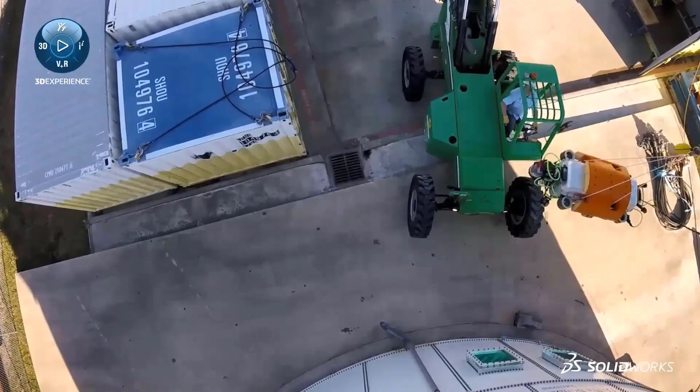Tackling the inspection of dark, harsh, and sensitive environments is the specialty of Square Robot, a startup based out of Boston, Massachusetts. Using advanced submersible robotics lowered into a petroleum storage tank, they autonomously inspect these environments for defects in the storage vessel using state-of-the-art sensing technology. By being able to use robotics for this task, they have reduced costs for their customers while improving accuracy. Their design is focused on safety and reliability for these unique environments, providing maximum uptime and allowing inspections to take place when and where humans would have to otherwise wait for the tanks to be empty.

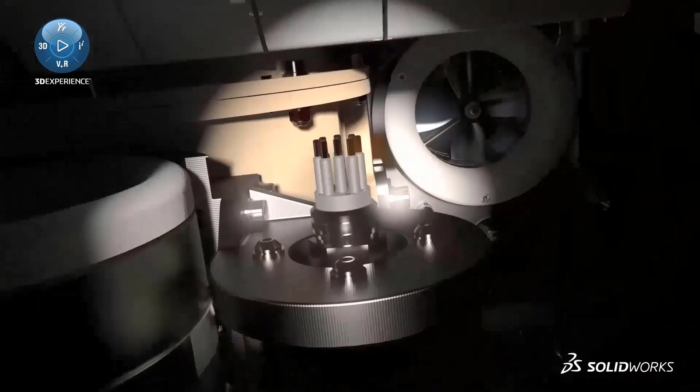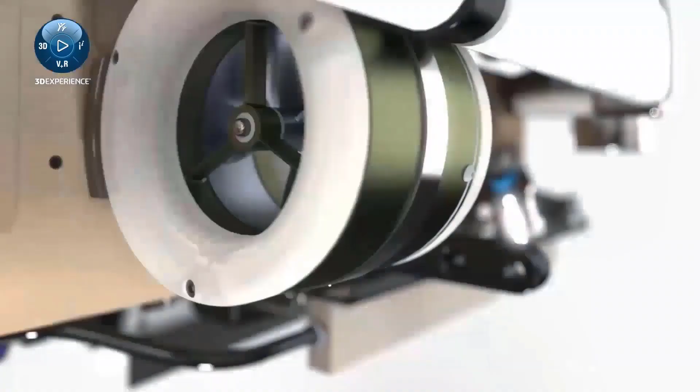Founded in 2016, Square Robot chose SOLIDWORKS and DelmiaWorks as their go-to design and management solutions. It was critical for them from the start to have the ability to work from anywhere, combined with best-in-class design tools.

Excellent. So Square Robot really focused on four key things in this first session that we're going to be looking at. We're going to first start off with what every good SOLIDWORKS user is doing, and that's modeling and detailing drawings and parts. Then we're going to take a look at how Square Robot used some of the new functionality in 2021 for their systems engineering department.

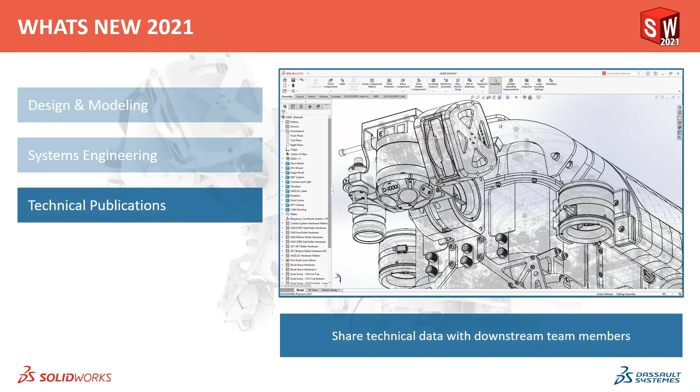And like all good design projects, we need to be able to share our technical data with downstream team members. So we'll look at how eDrawings and Composer can help publish and share some of our technical information with those non-technical people. And then last but certainly not least, how can we leverage the SOLIDWORKS suite of tools to help organize our entire team and our entire company to share, control, and be ready for production of our product.

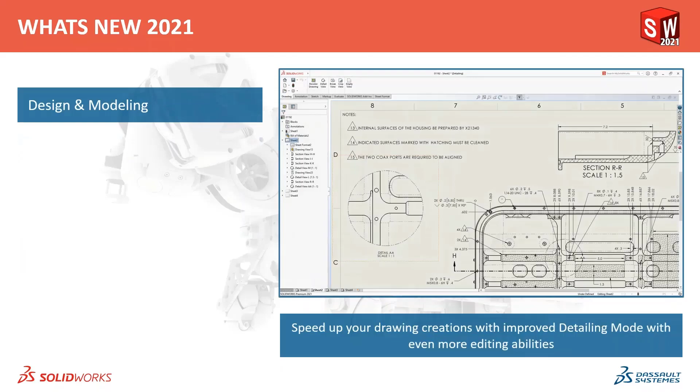So with that said, like most good design projects, let's start off with the basic design and modeling inside SOLIDWORKS. The first thing I want to leverage is some of the new enhancements regarding the actual interface. In this case, my task is to finish this part up, do some extrusions, and then do some circular patterns of the extrusion.

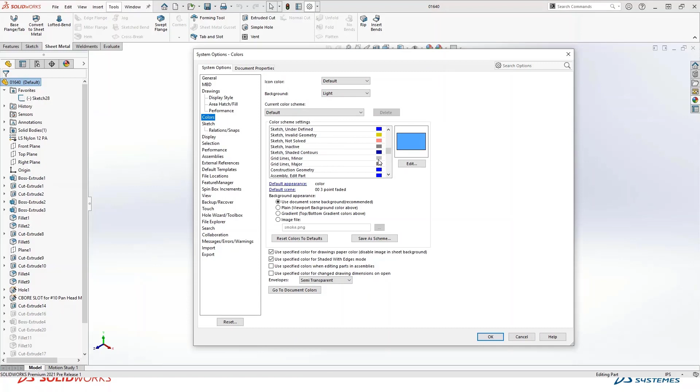Sometimes it's pretty hard and difficult to see things when all the colors are similar hues. So new for SOLIDWORKS 2021 is the ability to come in here and see colors. But on top of that, you can now see the color palette directly on the color scheme settings window, which makes it a lot easier to find what you're looking for, in this case my inactive sketches, and change it to a color that's maybe a little bit more appropriate or a little bit easier to see.

Now, some of my users always ask me, hey Roland, how do I get more screen space? New for 2021 is the ability to collapse the command manager by coming up here to the top right and simply clicking on the collapse window. On top of that, we can clean up the interface a little bit more by moving the quick access tools, which is this set of tools right here, from the menu bar over to the command manager.

Now, while we're here, I want to make it a little bit easier to navigate through my interface without constantly moving my cursor. One of my favorite new search functionalities is actually this functionality in the shortcut bars. You can now come in here and search directly for any tool that you're looking for by simply typing it in that search field in the actual menu.

In this case, I want to add a few shortcuts into my shortcut bar by simply dragging and dropping. You can use this search menu and add functions and features to anywhere in the interface. So I'll go ahead and add the undo and redo commands up here to my quick access toolbar.

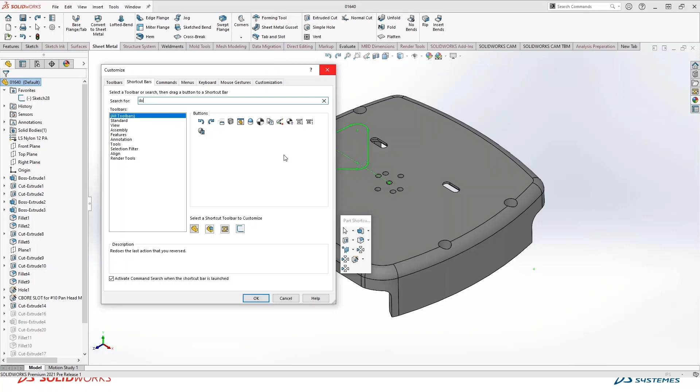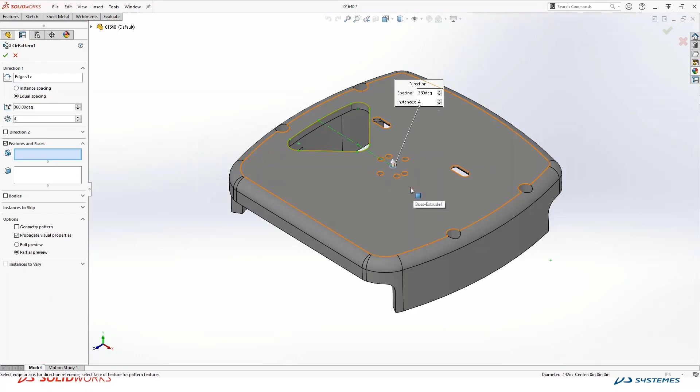Now that we've done some customizations to our interface, let's finish this design out. I'll go ahead and select my sketch, and use my shortcut bar to create this extrude cut to extrude the entire part. What's nice is by customizing your shortcut bar, you can limit the amount of traveling directly on your interface.

By putting your most common features into your shortcuts, in this case we'll finish this design out by doing this circular pattern. Now sometimes I do something that I'm not really fond of, and a lot of people, myself included, will use this undo command.

If you've been using SOLIDWORKS for some time, you know that undo has always been a bit of a challenge, because if you went too far back, you didn't have the ability to do a redo all the way through the feature tree. Now in 2021, the redo and undo is a more complete functionality. By simply clicking on this redo, I can go back and forth inside my feature tree, undoing and bringing back work that I've already created.

Let's keep moving through this design and finish up this sheet metal part. One of the design criteria is to have a stiffening feature that goes the entire length of the perimeter all the way around this part. So to do that, I generally use an edge flange.

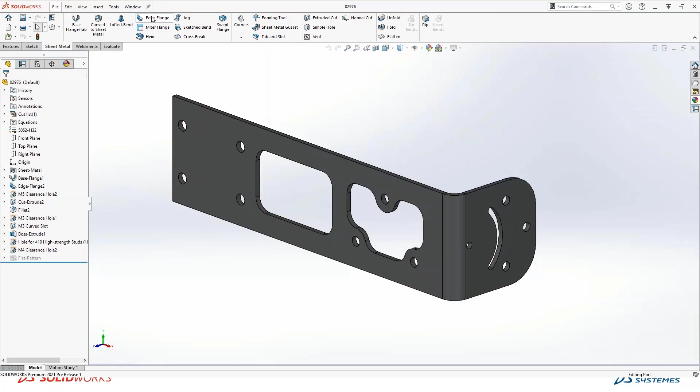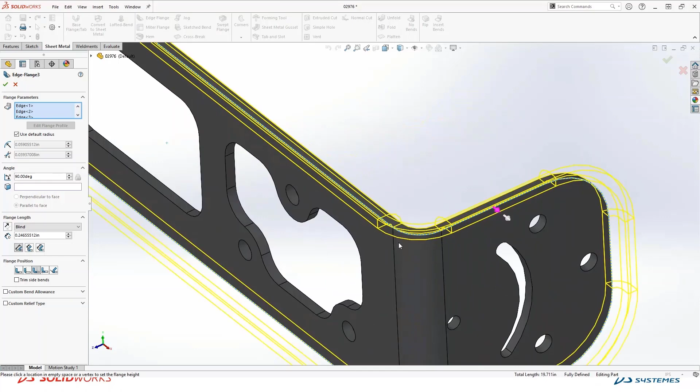What's new for 2021 is if you right click on any one of these edges, you'll see an option called Select Tangency, which has been around for years. But what's different is that now we can extend an edge flange across non-linear edges connected to a linear edge. In this example, my flange of a quarter inch is now being propagated across the bend region, giving me a more stiff component.

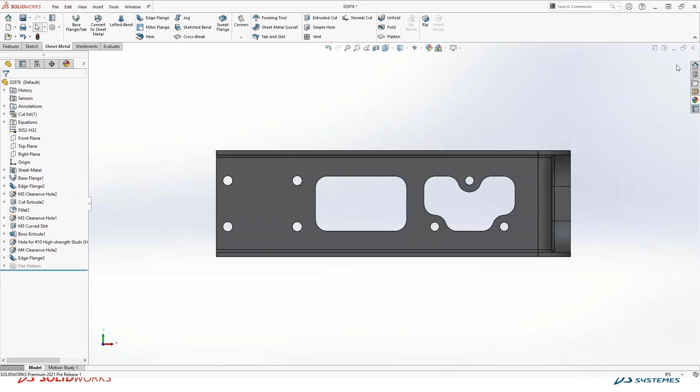What's really neat is, like any other sheet metal part, I can flatten this out and prepare it for a DXF for my manufacturing environment. So we're giving you a lot more functionality inside that edge tool to create more complex geometry.

Let's look at another way we can leverage that edge flange inside SOLIDWORKS. In this case, I have this edge flange feature right here, but I really need to protect these components on the inside of this roving vehicle. So let's do a quick design change.

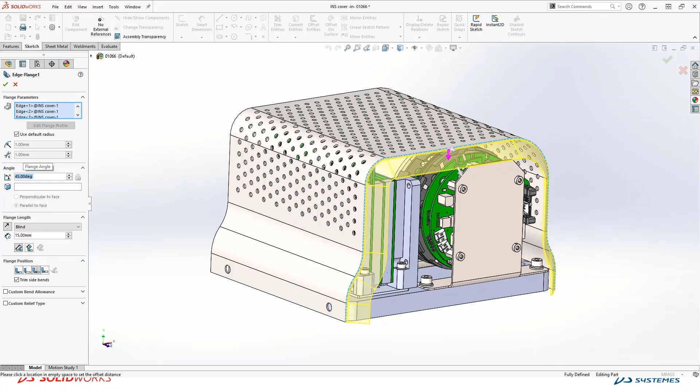I'm going to edit my part and edit this feature. You'll notice that even when bending an edge flange inside a bend region, I can go in either direction, and use all the common tools you're used to. In this example, I'll flip the rotation and modify the angle of this edge flange, producing a more complex piece of geometry that protects my internal components.

Just like before, if I want to flatten this out and create a sheet metal flat pattern for my manufacturing environment, this edge flange is able to be flattened and create a DXF just like any other traditional edge flange we're used to creating.

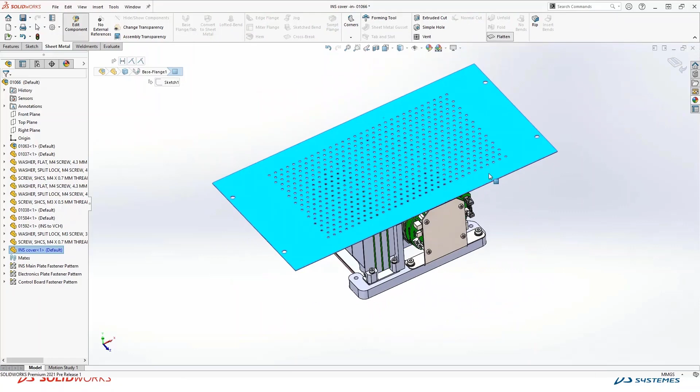With the advancements of technology, it's very commonplace these days for customers to use 3D printing. New for 2021 is better support for the new 3MF file type. I can save out by doing a save as and change my file type to 3MF. Underneath your export options, we now have better support for colors, textures, transparency, and many more features on that 3MF export, which helps you prepare files for 3D printing.

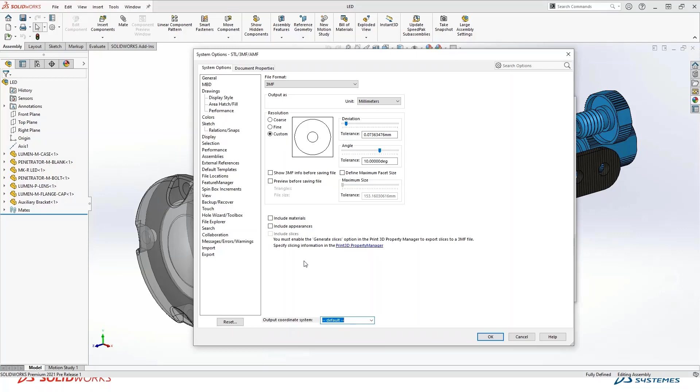Sometimes we get a 3MF from a customer, so how can we leverage that in SOLIDWORKS? By simply going to File Open, you can change your file type to 3MF, choose the file, and we now support per facet and per vertex coloring, as well as textures and transparency, which provides a better visual on that 3MF import of the graphic body.

Additive manufacturing continues to rise in capability and popularity, and we're trying to leverage and embrace these technologies by giving you better support for the common file types when doing 3D printing.

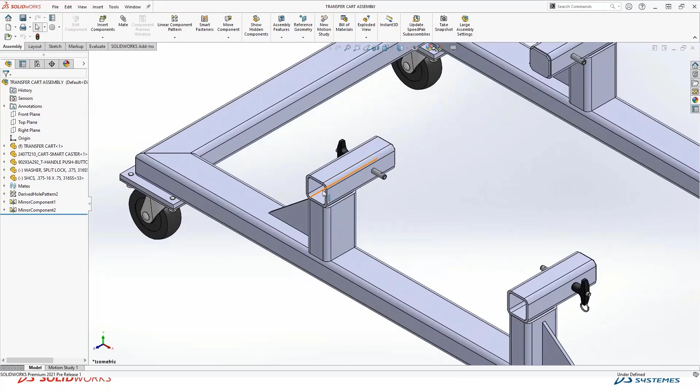By far, some of my favorite enhancements that I've been using so far this year in 2021 come inside the Weldment environment. In this example, I need to make a modification to these structure components, because there's a liquid getting trapped inside here when we put this down inside the vessel. So we want to create a mitered flange here as opposed to an end butt. Let's open this part up and start making our design changes.

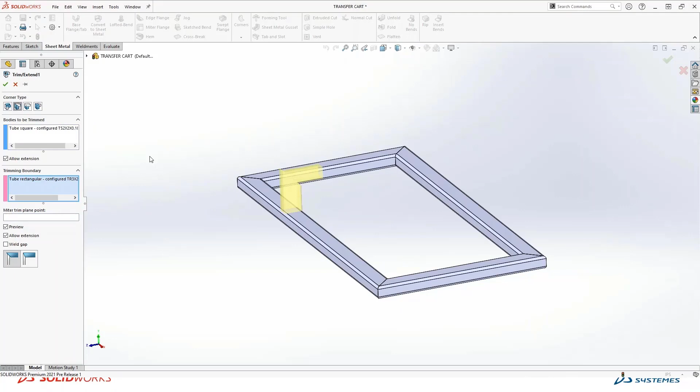So we can see this a little bit better, I'm going to roll my rollback bar up to this trim, and let's edit this trim. Now the challenge is if I simply move this to a miter flange, these two components are not the same shape and not the same size structure members, so I end up with a miter that doesn't accomplish quite what I need.

New for 2021 is a brand new option called Full Flush Miter. What this does is when I miter two components that are not the same size and not the same shape, it creates a flush miter as opposed to an angular miter. The benefit of this is now I don't have to come in here and calculate what that angle is going to be - SOLIDWORKS will do that automatically for me.

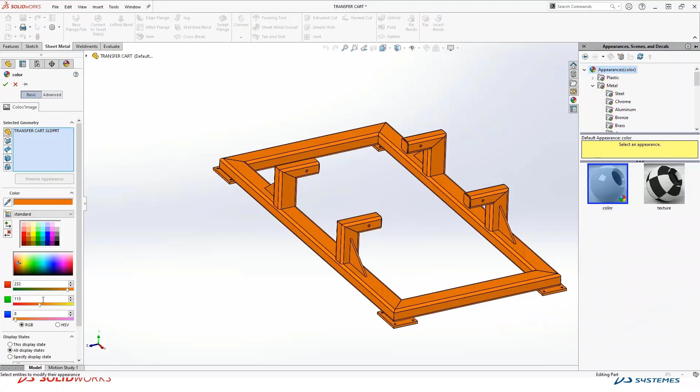Now the next thing we want to do is prepare this for our powder coating, and we want to give an accurate representation of what this is going to look like. Let's apply an appearance. Obviously I can use my standard color wheel or even create a custom color, but what I'm really after is the actual colors directly off Square Robot's webpage.

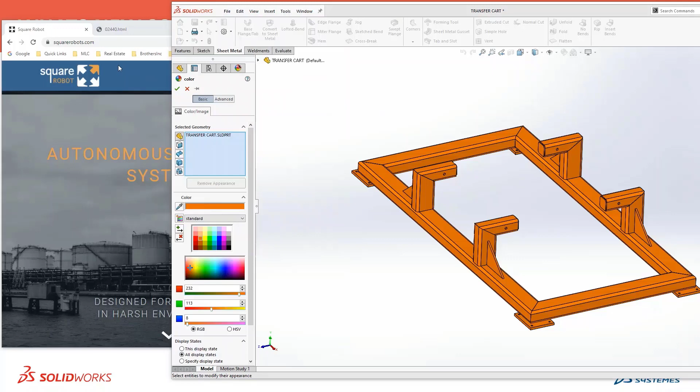Right here I have Square Robot's webpage, and what we want to do is take this blue color and apply it to this member. New for 2021, I can simply drag this eyedropper anywhere on my workstation, and it'll grab that color and apply it directly to the members inside SOLIDWORKS. In this case, I'm going to confirm that, and we're going to apply a new color to these vertical members of the weldment.

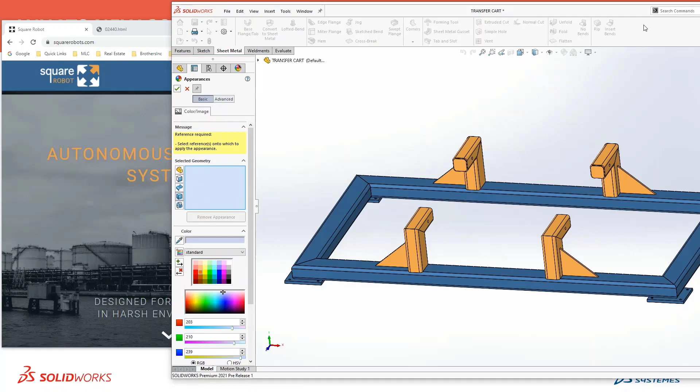Let's do a quick body select - we've got all our members selected. We'll grab our eyedropper, drag it to a new color, and drop that. We've made it much easier to create custom colors without having to know the exact RGB values of those colors, by leveraging the brand new eyedropper inside 2021.

Now, by far, my favorite enhancement is the ability to leverage equations in custom properties. In this example, we want to calculate the cost of this, cost per file. The new type you're going to see is called equation. I can hit equation and have access to all my global variables, common functions, and properties of the file. In this case, we're going to grab this global variable called estimated finished cost, and multiply this by the total mass to get cost per file. We can see that it's approximately $428.60.

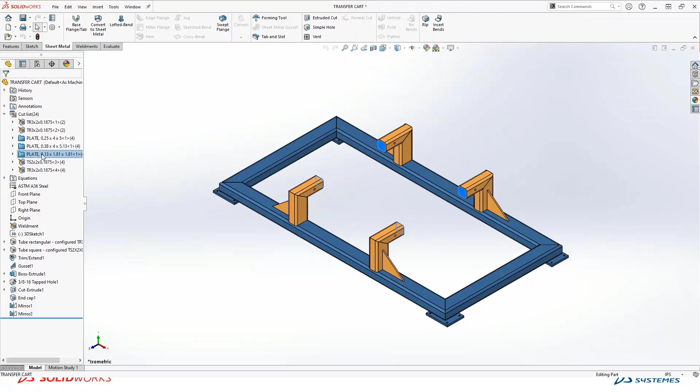Now we can leverage that same piece of functionality inside a cut list. In this example, I want to know what the total length of these little plates are. By right-clicking on properties, I can create a new cut list property called total length. Again, the new type you'll see for the property is called equation. Once I choose equation, I have access to variables, functions, properties. We're going to take the quantity of components and multiply that by the total length, so now I can see on my cut list that I need exactly 7.24 inches of material for this cut list member.

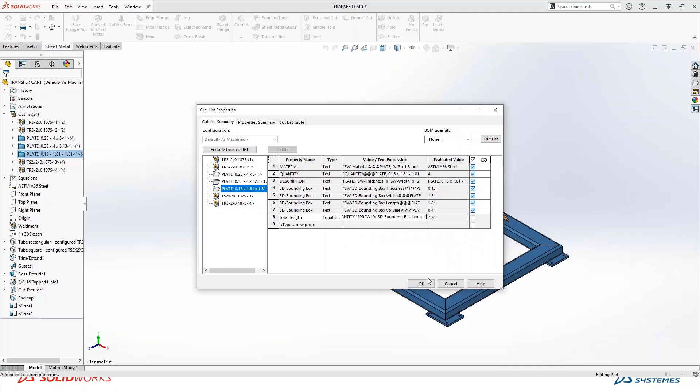2021 is providing a lot of good functionality to help you get your design tasks done even faster. Now to finish this project out, the next thing we're going to do is finish detailing a drawing. If you're not familiar with this tool, there's a new tool we introduced last year in 2020 called detailing mode. When I open up a drawing, instead of opening it fully resolved, I can open this drawing in a mode called detailing.

What this does is when you open up this drawing in RAM, it prevents SOLIDWORKS from needing to load all of the child components, sub-assemblies, and top-level assemblies into the RAM of your hardware. You can see this by looking in the Open in SOLIDWORKS panel on the right-hand side of your screen. You'll notice I'm not loading all of the child components into my RAM.

What's the byproduct of this? The byproduct is that you can work and detail drawings much faster. My general workflow is to get all my views created, especially when working with large assemblies, save my drawing, and then open it up in detailing mode. The benefit is in 2021 we've expanded the functionality and all the tasks you can do in detailing mode.

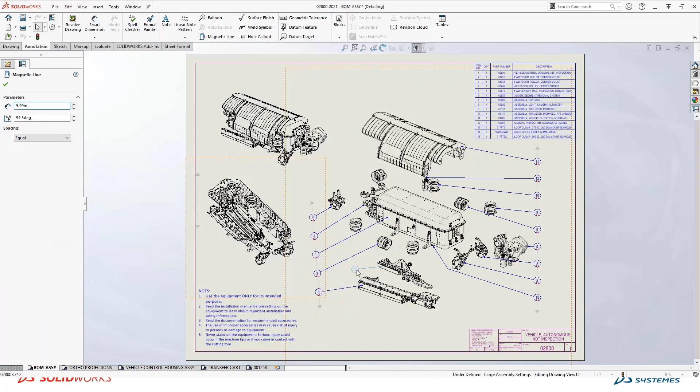Now in detailing mode, you can add any kind of balloons, with the view or without needing the view to be loaded. I can modify any annotations. In this case, we don't need to know not to stand on this unit—we already know that, so I can get rid of that.

Maybe I want to come over here and finish detailing out this last page in my drawing. I notice that my dimensions are going off the screen, so let's go ahead and fix that. Leveraging detail mode, we can come in here and use any of the view creation tools that we're used to using.

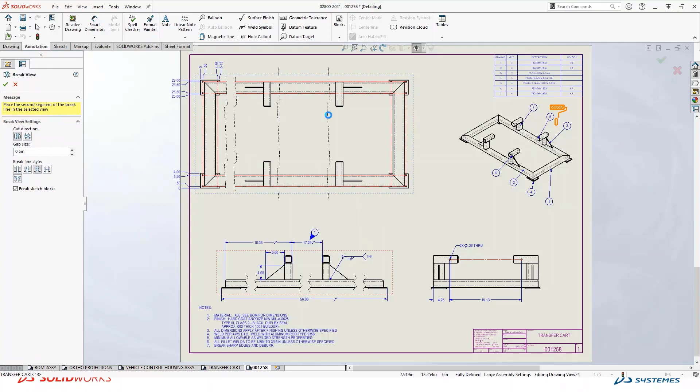In this example, let's go ahead and do a break view on this top view of our unit. To do that, I would use the exact same steps I'm used to using, simply left-clicking and placing my break view signifiers directly on top of this top view.

Once I'm done creating all my break views, I can leverage all of my dimensioning tools that I'm used to using inside this detailing mode. In this case, we'll go ahead and confirm this, right click up here at the top, and add the rest of the dimensions to this ordinate dimension. I now have access to all the dimensioning tools in this detailing mode without resolving that actual file.

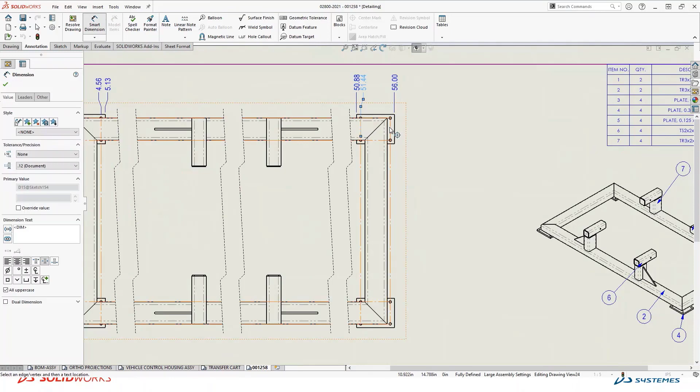Now, the last thing I need to do as far as this top view is create a detail view. So we're going to come in here and create one more view. The really neat thing about this is that, again, I'm not having to load all of the components into RAM to actually generate this geometry.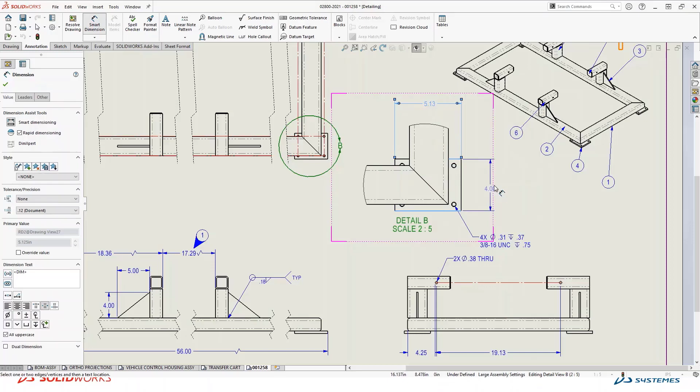I can leverage all the things I'm used to using. For example, I can now use the hole callout command and my normal smart dimension. What you're going to notice is that with smart dimension, whether you're in detail mode or not, creating dimensions is much easier because the dimension is now transparent, where you can select through the dimension without having to hide it or do all sorts of funky things with your cursor.

Now, in some instances, I create sketch blocks or sketch geometry inside my drawing environment. We've made it much easier to add relations using the same familiar buttons and clicks that you use in the part environment. You can now add relations by simply doing a control select and creating your relationships using our standard relationship menu.

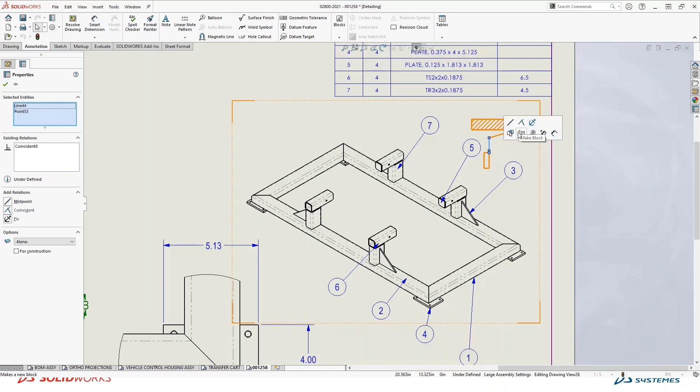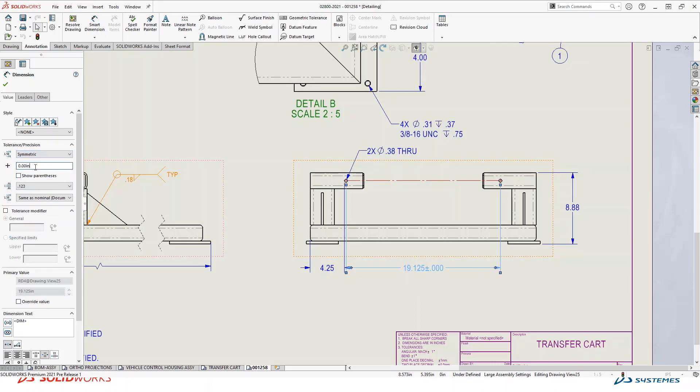Along with that, while we're in detail mode, we can modify any existing dimensions. In this case, I noticed I only have 2 decimal places on this bottom dimension. I need to add a 3rd decimal place, and let's add a tolerance directly into this interface. We'll give this a tolerance of plus or minus 5 thousandths.

While I'm down here, still in detail mode, I notice this dimension is not going to the correct location. I get access to all of the options and properties in any of my dimension windows. Simply clicking on that dimension, I can now change this from the minimum arc length to the center arc length to get the dimension I'm truly after.

We've added a lot of functionality, and these are usually some of the favorites amongst both new and old SOLIDWORKS users alike.

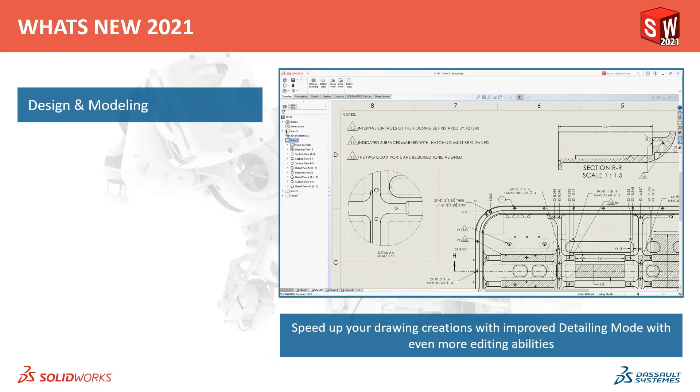Now, the last thing I want to show you is really a performance enhancement, and the best way to show you that is to do a little compare and contrast between previous versions of SOLIDWORKS and the new version of SOLIDWORKS in 2021. In this case, this is going to be our drawing performance enhancement.

When working with large drawings, view manipulation is vital to having a good user experience. Over the years, we've tried to optimize this so your on-screen manipulations go fast and smooth and easy. For SOLIDWORKS 2020, we added a new option called Enhanced Graphics Performance inside the assembly commands. We've added that into the drawing commands for 2021.

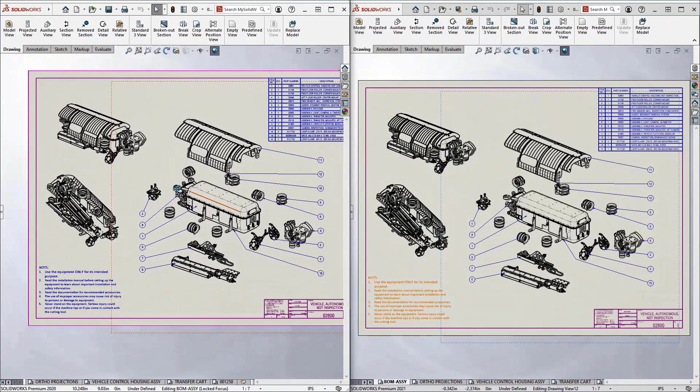On the left, you're going to see SOLIDWORKS 2020, and on the right, you'll see 2021, in a side-by-side comparison on the same set of hardware, on the same 5-sheet drawing open. Let's start with just panning the drawing in the document window. Notice that 2020 does a pretty decent job, but you can see there is some latency as we pan the drawing. The same panning action in 2021 on the right-hand side is dramatically faster and keeps up with your mouse movement, just providing a better experience.

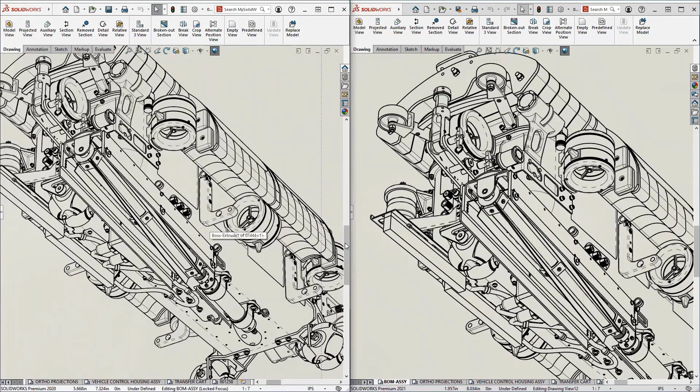Zooming in and out can be just as dramatic, and panning while zoomed is lightning fast. For comparison, we'll repeat the same steps from 2021 on the left-hand side in 2020. Again, notice that there's a little bit of latency, which can sometimes be confusing if you overshoot your zoom magnification due to that delay. Panning is better while zooming. It's much faster and precise in the new 2021 software, which is taking advantage of a lot of the new enhanced graphics performance in the hardware that's being developed.

The second sheet of this drawing contains even more views of this 2400 part assembly, and the performance is even more pronounced as we pan around.

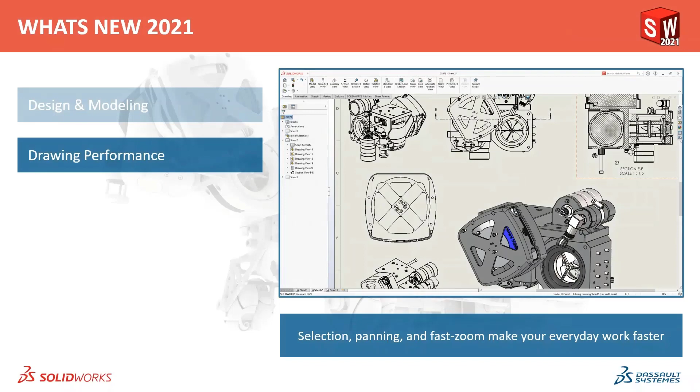Now that we've finished detailing this drawing out, and we finished all of our 3D modeling, let's look at how we can leverage some of the new tools for our systems engineering department, so that way they can produce the wire harness for this robot.

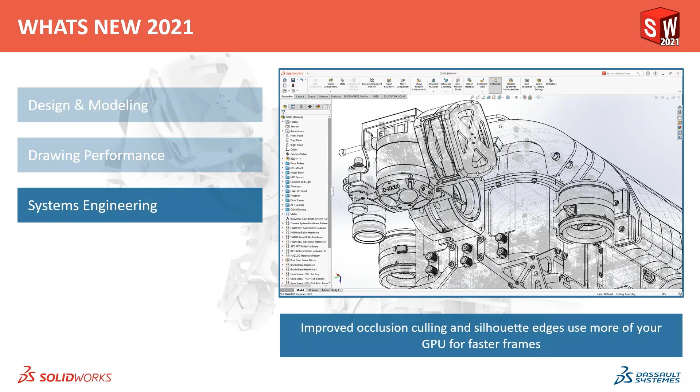The tools in 2021 for the system engineering, specifically the routing and electrical schematic tool, are some of my favorite enhancements for system engineering. If everything we designed was just a square shape or a rectangle, wire harnessing wouldn't be a big deal. But in the electrical world, the path of electrical wiring and harnessing can take many forms, including lines and splines. New for Electrical 2021, we support the use of both splines and lines to create route paths.

We created a routing path using both splines and lines for this harness that connects the transducer underneath the cables and following along the wall. Let's adjust several of these arcs and curves and get a smoother path. In the 3D Electrical tab of the command manager, choosing routing harness options, you're going to see many new options for the routing of splines.

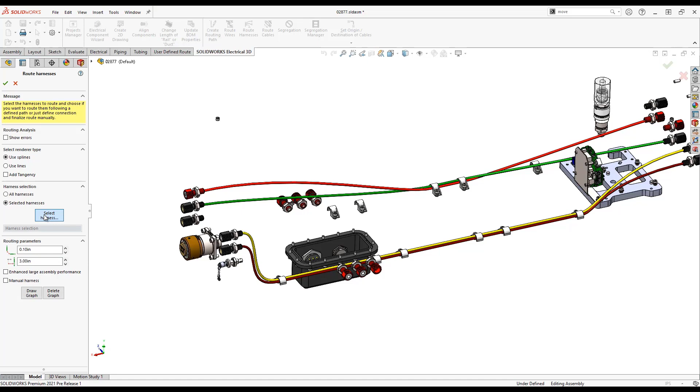After the routing is finished, the harness is going to follow the predefined path that we created with splines, lines, and arcs. Supporting splines along with lines and arcs in creating the route path for electrical harness greatly improves the versatility of creating complex routing harnesses and complex products.

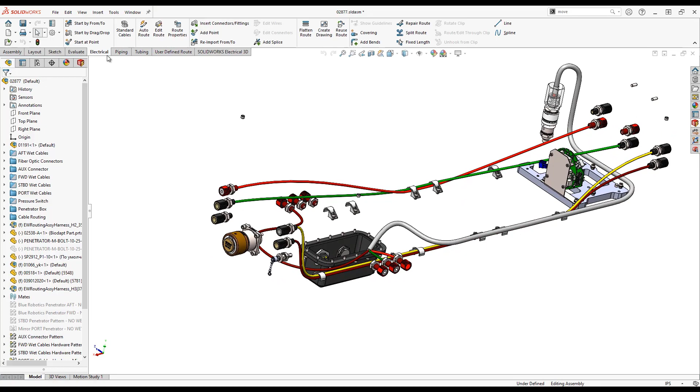In this case, it's common to have multiple cables starting from a single connector. So what we can now do is splice these, making sure that all of our connectors have the same paths in our electrical system.

In SOLIDWORKS Electrical Schematic 2021, we've improved the cable properties, including a new field called Separate 3D Route Assembly. The same parameter can be used in the routing cable command to provide maximum flexibility to users on how and where they want to initiate this new parameter.

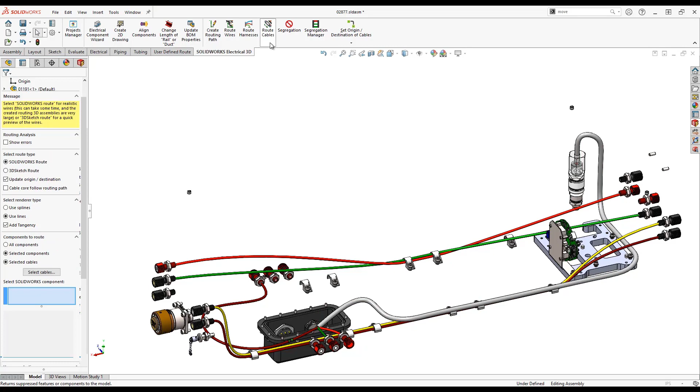In this case, we've already created two separate routing paths, one for each cable, starting from the round 10 connector that brings the signals from the outside world and connects to the PC board. What we're going to do is choose to route these two cables at once, but maintain them as separate assemblies. So it's the same route, but the byproduct is to have two discrete separate assemblies in the routing harness. This allows us to create more complex and rich functionality by bridging the needs of the electrical team and the mechanical team to create one route that's leveraging two harnesses.

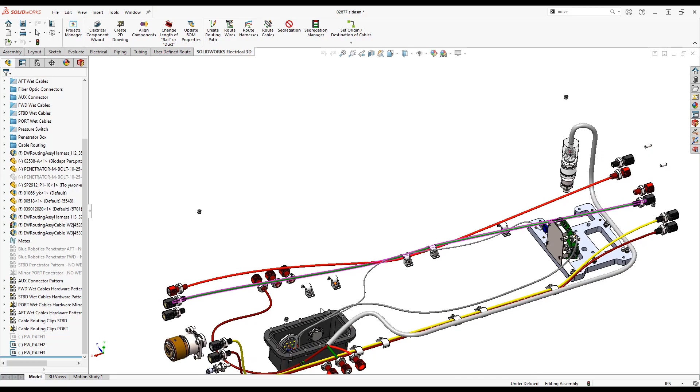Now that we've finished up our routing and electrical diagram, let's look at some new functions that will help us share technical data with downstream team members. We're going to look at how we can share this technical documentation. One of the most common questions I get is, how can I send somebody this model and what can they do with it? I need them to view it, do measurements, and look at custom properties. Let's look at probably my favorite set of enhancements for eDrawings that I've seen in a long time.

New for eDrawings 2021, you can now see all the custom and configuration properties directly from the eDrawings viewer. This gives non-technical people access to technical data like revision, manufacturer, and mass. If you're using design tables, we can now see configuration specific properties such as description, drawing number, vendor part number, and title of the model or assembly.

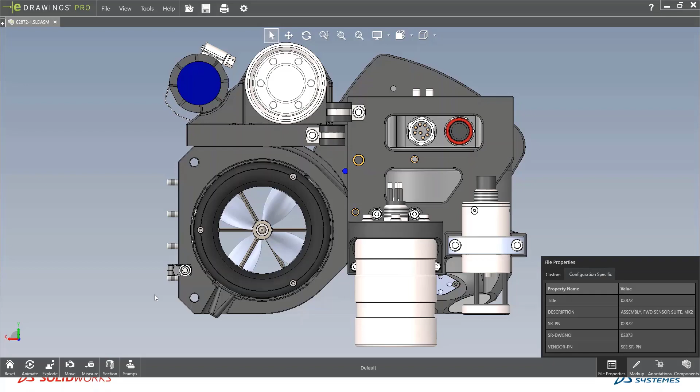Along with that, we have a much more robust measuring capability inside eDrawings. If I rotate this around, I want to see the center to center measurement of these two bolts. In some cases we need the maximum or minimum distance, so you're going to see more complete measuring functionality. I can toggle between minimum, maximum, or center to center distance.

Along with that, I can pull more measurements from non-planar and cylindrical edges. In this case, I wanted to see the normal distance from the top face of the part to the center of this shaft, which is 1.807 inches.

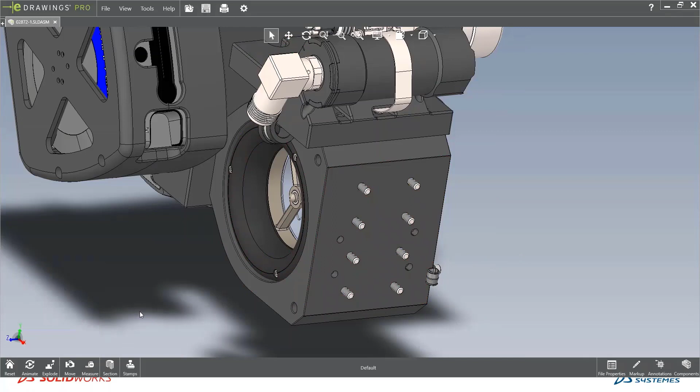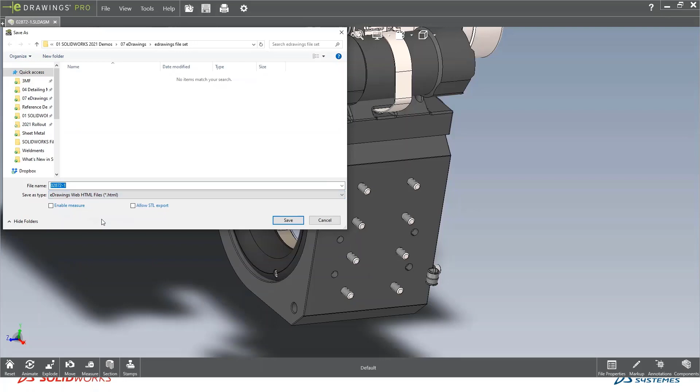One of the most common questions people ask is, do I absolutely have to install eDrawings to view a file? I'm glad to introduce this brand new function within eDrawings Professional called Web HTML. From eDrawings, you can do a file save as, and save this eDrawing file as a Web HTML document. What this does is you no longer need eDrawings to view it. You can take that HTML web file and open it up with any common web browser.

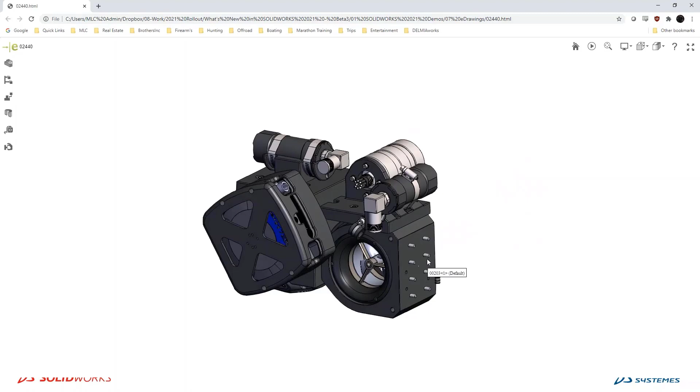In my example, I'm using Google Chrome to look at that same file, but instead of installing eDrawings, I'm viewing it directly from a web browser. The great thing is we get all the same information we'd see inside SOLIDWORKS or eDrawings - for example, the bill of material and component tree. In some cases, maybe the sales team wants to explode this out, so I can come in here and do a quick explode without having SolidWorks or eDrawings installed.

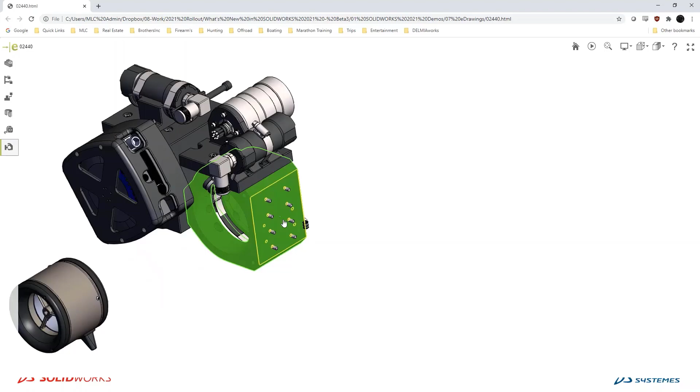If you wanted to dig down into this assembly, we can create a section view. Probably the most common thing to do is pull a measurement, but by far one of the things I'm using most is the simple move component command. This gives users the ability to grab a part from the screen and start decomposing it, taking a deeper look at how it's actually put together.

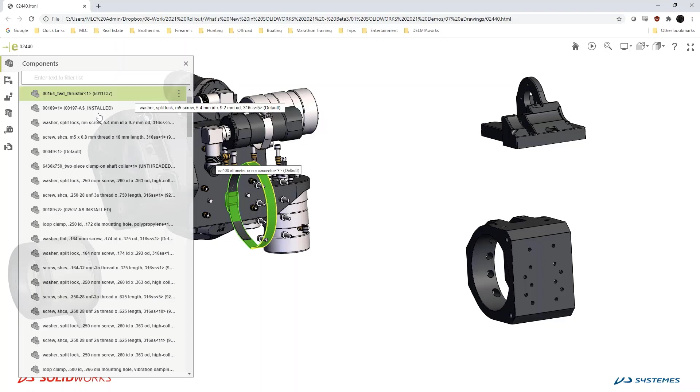Where I'm seeing a huge benefit is for non-technical people who want to find a specific part number inside the interface. I can move things around, simply select the component I'm after from a web browser, and now see the actual part number of that component. So eDrawings is providing even more functionality to share this technical content with people downstream who may or may not be SOLIDWORKS users, or may not be technical enough to use the SOLIDWORKS environment.

The next thing we're going to look at is how we can organize our entire company using the suite of tools to help manage files, projects, and even things like inventory and production control. Let's start off with leveraging one of my favorite tools that I use most often, and that is PDM. One of the best features of PDM has long been the integration with Windows Explorer.

In 2021, we support the latest Windows 10 elements like the ribbon interface that's even better than before. While icons are visually appealing, the details mode of Windows Explorer is really where the power of PDM starts to reveal itself.

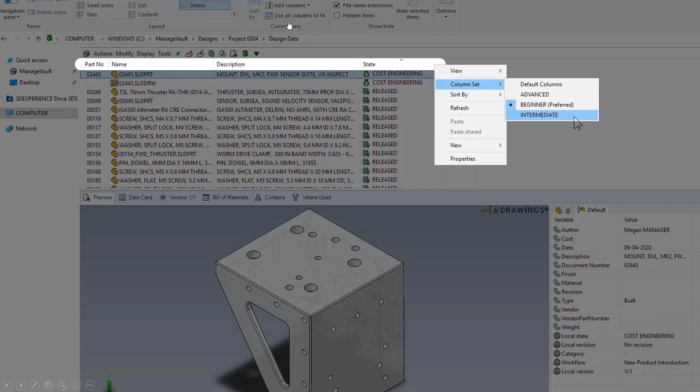Columns can define specific sets of visible properties that users can work with in this detail view. In PDM 2021, you can now customize these columns even further in more places and provide choices with multiple column sets. In this example, we're giving our user one of 3 column sets to navigate with: beginner, intermediate, or advanced. You can define these columns in more places, such as the quick search results.

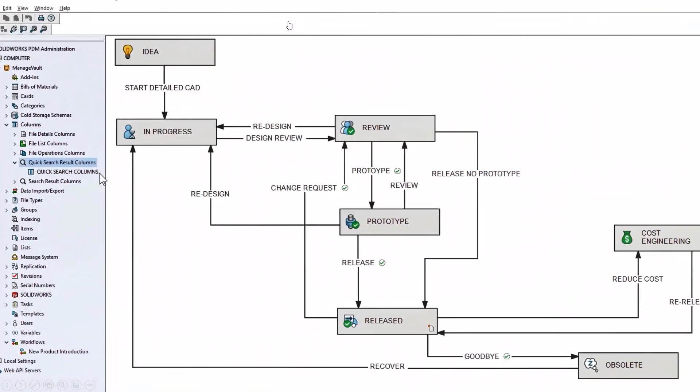You can add, move, remove, or even rename, and you can define the permission of the view and the default preference per user or group. You can provide meaningful access to data for everyone.

In 2021, you're going to see this new administrative permission that gives you more granular control over user ability to customize their columns. In this case, we might want to limit or force a specific column view on a specific set of users or specific set of groups.

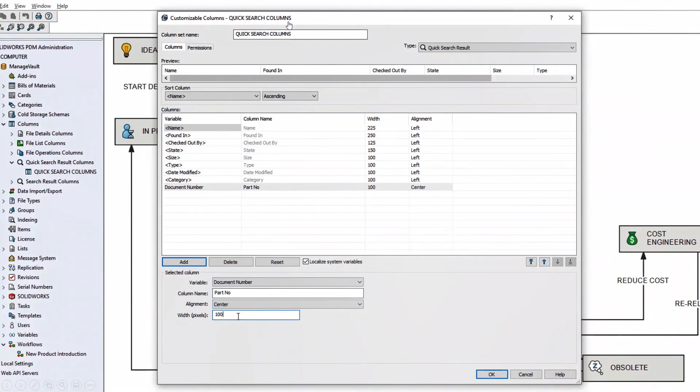Like everything in PDM, this is completely configurable, so you can create your column sets exactly how you need, giving the people who need access to them the way that you want.

I've been building workflows for many years, and as you build workflows, I think you're going to enjoy the new and updated icons for states and transitions in 2021. These help give you a better illustration of where you're at in the process and help you define your process flow with a better visual, so that contributors can recognize where they are directly from the Windows Explorer interface. Gone are the days of choosing the 7 basic icons you're used to seeing.

Now let's do some design change inside this assembly, and let's see how PDM can help us understand our references as we manipulate both child and parent components of our assembly.

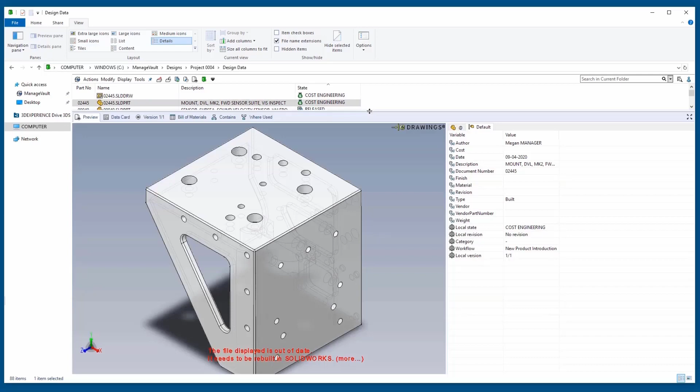In this case, I have the mount for the sensors and it's in the cost engineering state. I'm going to go ahead and help with redesign about this, but I want to see what impacted references I should be aware of before I start actually changing this part.

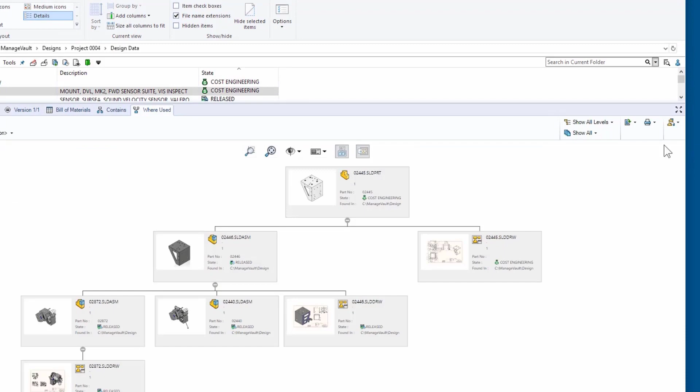New in PDM Professional, the Treehouse view is now available in both the Where Used and the Contains tab. This visual reference can be printed, and it can be exported to an Excel file with thumbnails, which could also become part of your change order documentation.

A quick multi-select, and I can check out all the right parts and the assemblies and the drawings that I need to make the change.

Now, fast forwarding, I've redesigned this bracket to use aluminum plates. I've converted this into a weldment and I've created a cut list. New in 2021, cut lists are fully supported in a PDM calculated bill of materials. Even the option called exclude from cut list is now taken into account.

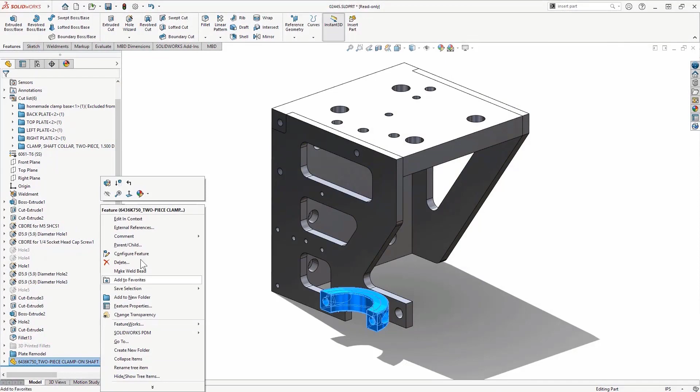It's not just weldments that are better supported in 2021. Derived part references, like those created from things like insert parts, mirrors, or 3D interconnected imported parts, are included as well. So you're getting a lot better support in the multi-body environment for calculated BOMs.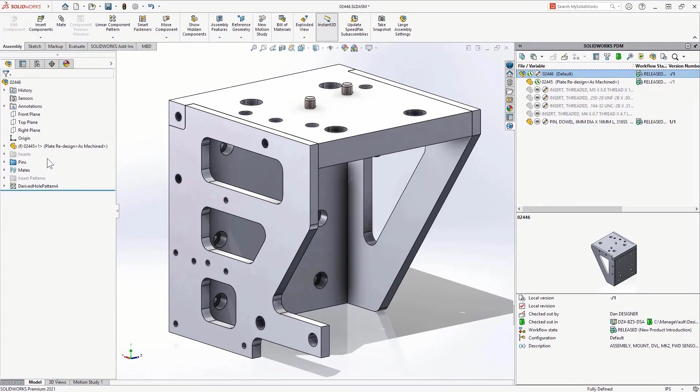Now, let's go take a look at the bill of material and let's compare the bill of material from before I converted this to after the conversion. In this case, I've promoted the child components to the top level.

And now when I look at the version history inside PDM, I can see that PDM is taking into account my modifications in the version history of this weldment. So I'm getting the true cut list at the top level bill of material.

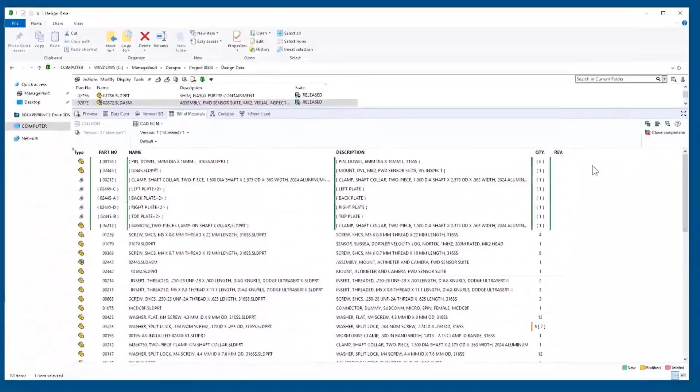With the expanded configurability and increased performance in PDM 2021, I really think that your engineering teams, your production teams, and your manufacturing teams are going to be able to go to that next level of design and organization management. Now that we've looked at our file management inside 2021 using PDM, the last thing I want to show you is a tool that you might not be as familiar with.

It's called SOLIDWORKS Manage. Manage is a tool that can help us manage bills of materials, advanced processes, and most importantly for me, I'm using it to manage my project status.

Managing multiple projects is common for most project managers. New for Manage 2021 is the ability to create project lists. Lists can be created to meet individual needs or defined by an admin and shared globally. Project lists provide easy visibility to powerful resource management tools like scheduling, capacity planning, and load charts.

These tools help you make more informed decisions about project start dates and deliverables for your project status. Assigning tasks to users and allowing them to update their completion status and deliverables is a powerful way to keep up to date on the progression of a project.

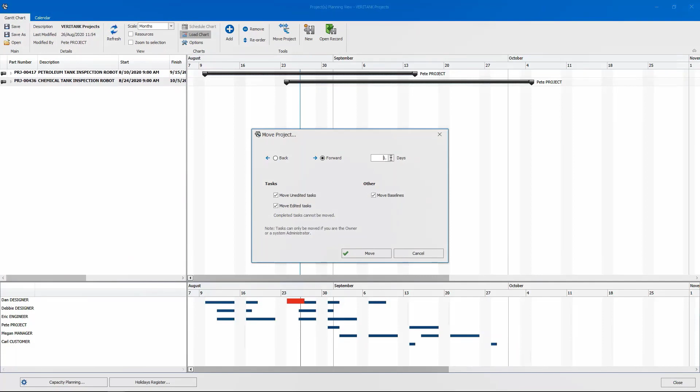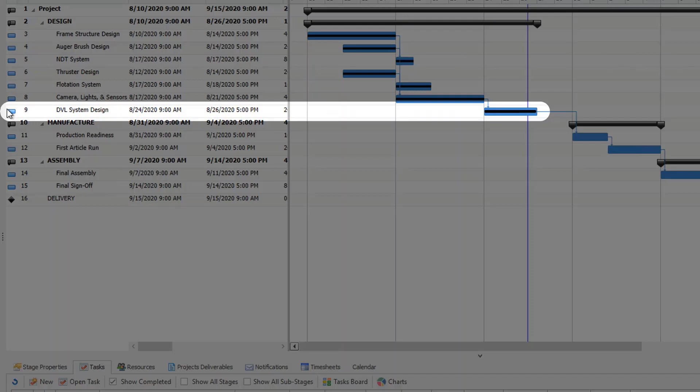New for Manage 2021 is a new service called Auto Update Project Service. This background service can be configured to check for task updates and automatically update the completion progress of project stages. Additionally, any attachments that have been added to the task can be automatically transferred to the deliverable section of the project. This is really good for things like assigning tasks to create simulations or an ECO process that's going to deliver a report, like a simulation result PDF report or maybe an ECO document.

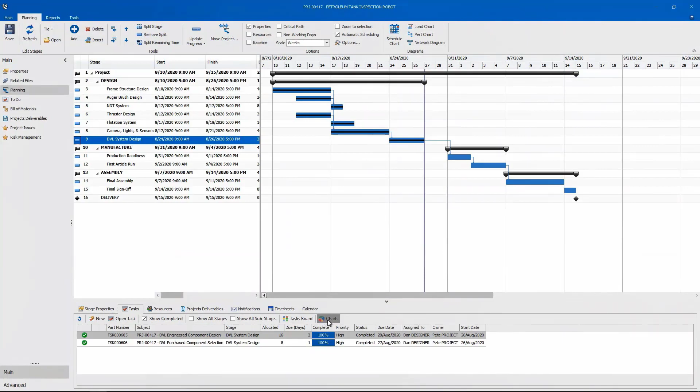Manage 2021 also provides new ways to visualize project tasks. Out-of-the-box dashboards are accessible directly from the project and provide clear visibility to the project managers. These task dashboards can now be grouped by priority as well as status. This allows you to quickly visualize the assignment of tasks, and with a simple drag and drop, tasks can be moved to in progress or working on or completed. With a double click, the task information can be accessed directly from the task dashboard.

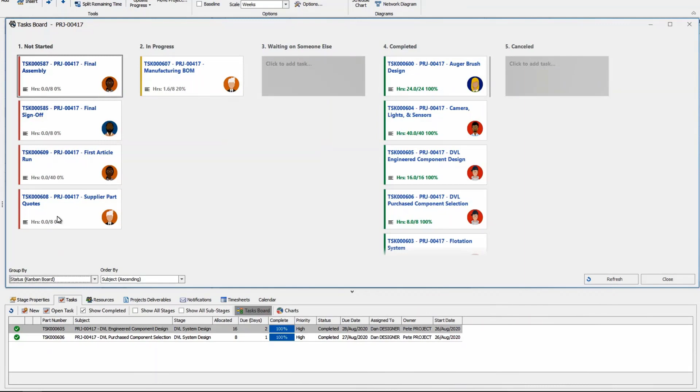All these tools help you organize not just your files in PDM, but also your overall project status, and it helps tie together the loose ends from file creation to production to ECO process and everything from start to finish of the design process.

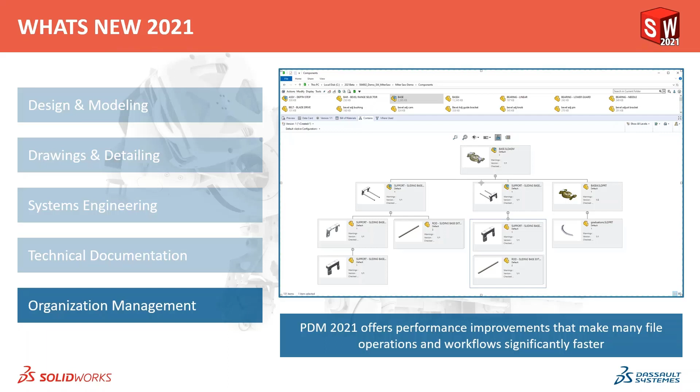For years, MLC CAD Systems has been the go-to resource for your engineering, development, and documentation needs. But we understand engineering is only a part of what you do as a business. How can your manufacturing, procurement, planning, and warehouse teams utilize this information to deliver quality products as quickly and efficiently as possible? This year, we're excited to introduce a new solution to the MLC CAD Systems family, DelmiaWorks. Formerly IQMS, DelmiaWorks is a manufacturing enterprise resource planning solution focused on leveraging your data to streamline production, improve overall equipment effectiveness, and ultimately win you more business.

Let's take a look at how SMC Metal used DelmiaWorks to shorten lead times and cut costs across the value stream.

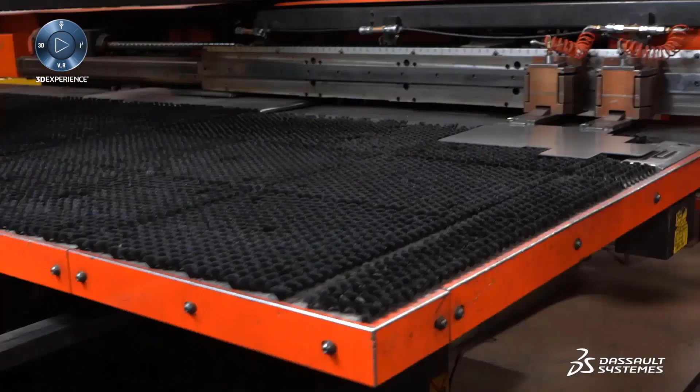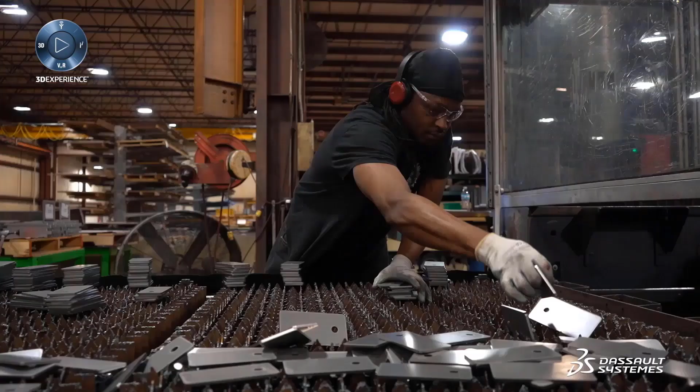My name's Dan Riedinger. This is SMC Metal. SMC is a custom metal fabricator, been in business for over 70 years. We currently employ about 120 people doing business with a number of large original equipment manufacturers, heavy equipment predominantly in the construction and other industries. We've been using SOLIDWORKS for many years. The speed with which it allows us to integrate with our customers' drawings to make prototypes and production parts is a differentiator for us in the marketplace.

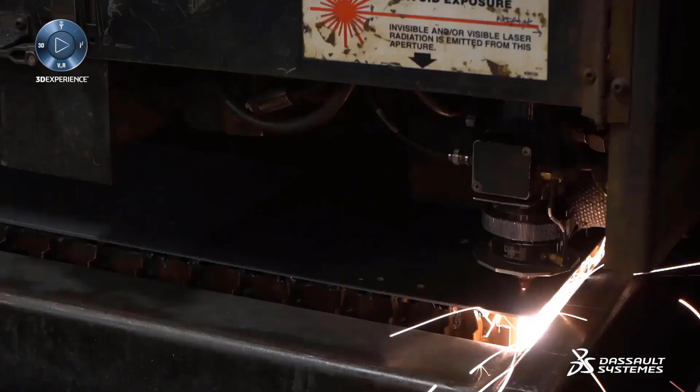Recently, we did an upgrade to our ERP system and moved to IQMS. One of the goals of the project was to integrate our ERP system with our engineering system, which would allow us to move to a paperless environment in the shop, which was one of our number one priorities in the project. Those changes and that integration has allowed us to significantly increase our speed of manufacturing and reduce costs across the company. IQMS was a major turning point for the company.

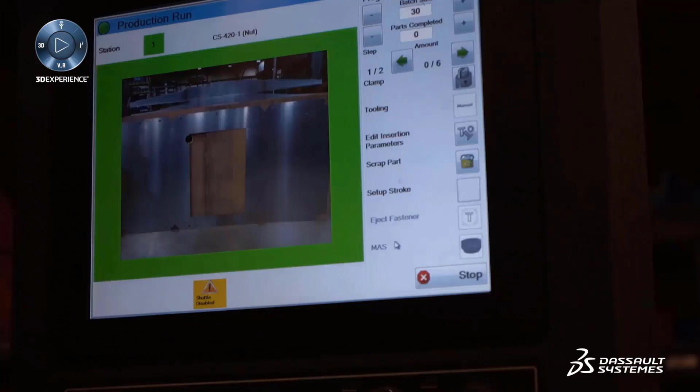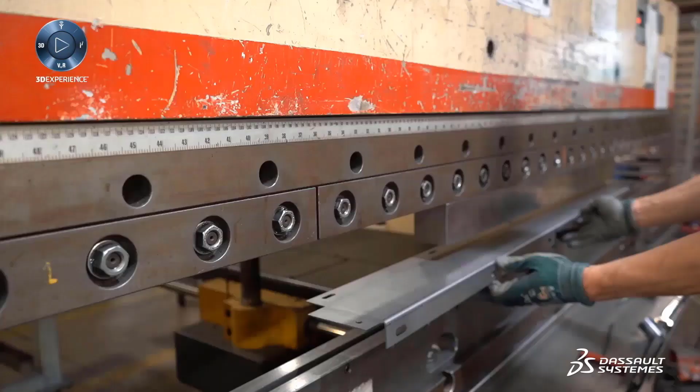Prior to our IQMS implementation, we were several years behind where we needed to be from a technology standpoint. We felt it was critical to be able to integrate our software with our engineering packages. We needed to move towards paperless for a number of reasons, both internal and external, and IQMS provided a great vehicle to do that. The recent acquisition of IQMS by SOLIDWORKS' parent company will only advance their product in the future of the industry.